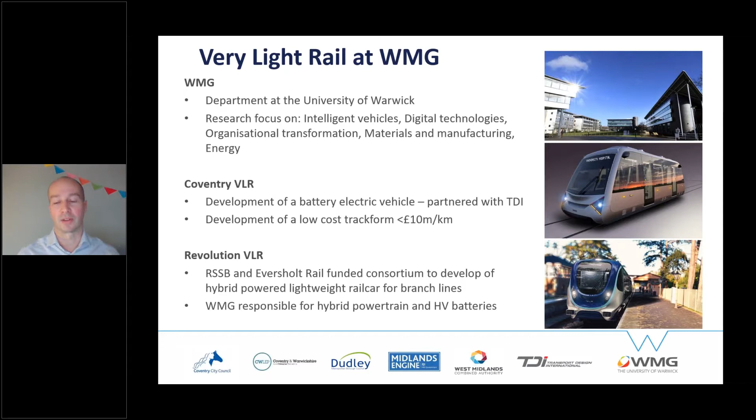So today I'm specifically focusing on the Coventry Very Light Rail project. We started off probably around 2017 with the Coventry vehicle. We've been working with Transport Design International right from the start of this project, and I'll take this opportunity at the beginning just to thank them, because obviously we couldn't have done it really without them, so it's been really good to have them on board.

We basically started off with some fairly all sorts of crazy ideas for what the shuttle might look like, and came up with a concept which the council bought into. And ever since then, we've really been focusing on trying to deliver something.

The clear direction at the beginning of the project was essentially a desire for a small shuttle vehicle, short headways, 3 to 5 minutes, with no timetable, very much an electric, zero emission vehicle, and cost and low mass certainly were a key focus for us. So that's the brief summary of where we started.

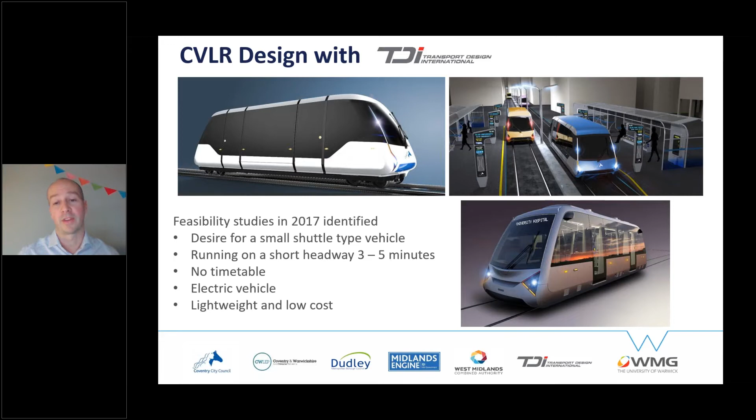We've got a rendering, bottom right, of the approved look and feel of the final vehicle, and I hope you'll agree that as we've progressed, we've ended up with a vehicle that looks very similar to that. Our current status in terms of the build is that amazingly, despite COVID-19, we've actually managed to continue.

The supply chain have done their very best to keep supplying parts and such like. The pictures you see here were taken a couple of weeks ago at the build site, which is in Coventry, NP Aerospace, and it's been a great achievement to get to where we are.

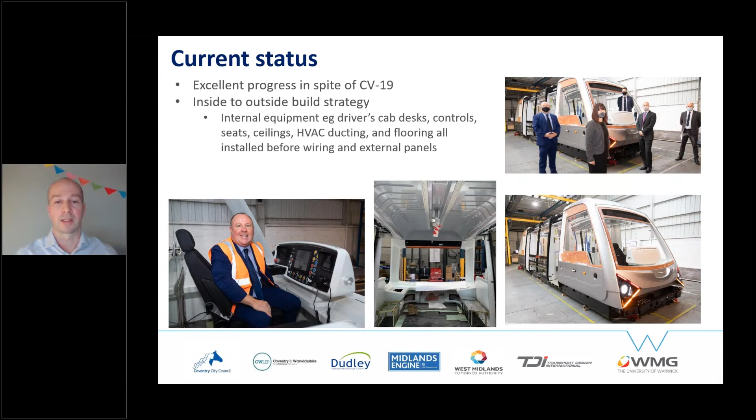You'll notice from the pictures it's sort of a skeleton you see there. The build strategy has been very much: we build the skeleton, then we put all the interior in, and then we put the wiring and the external panels on it. So it's not necessarily built in a conventional fashion, but we're making very good progress, and we hope to be on track in around February 2021 at Dudley.

So just what I'm going to talk about today in a bit more detail. First of all, the UK content - it's designed and built in the UK, but there's still plenty of opportunities for future vehicles. The fact that it's a zero emission vehicle, a bit of detail on the battery, how we charge the vehicle, and a little bit on the construction of the vehicle itself.

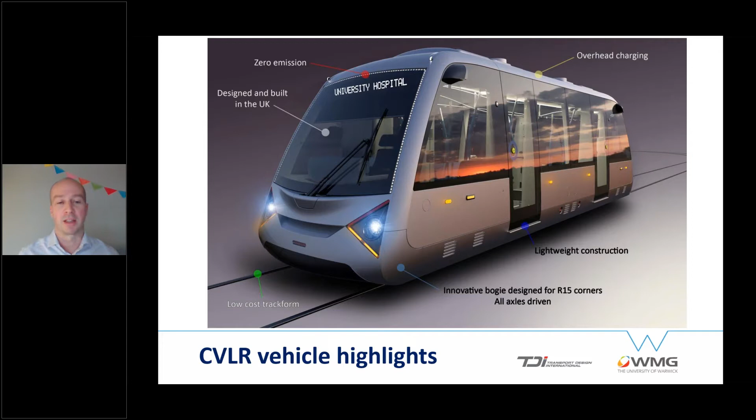We do have what we consider to be an innovative bogie. It is subject to a patent application, and as such I won't be giving any real detail about that. But we will be talking about the low-cost Trackform - Chris will be talking after me essentially about the low-cost Trackform, so I won't say anything about it. I'll just focus on the vehicle.

In terms of the UK focus, we think, certainly in combination with TDI and everyone else in the supply chain, we've achieved essentially over 70% by value in terms of the UK content for the vehicle, which we're really impressed with. Actually, it's been a great achievement to do that.

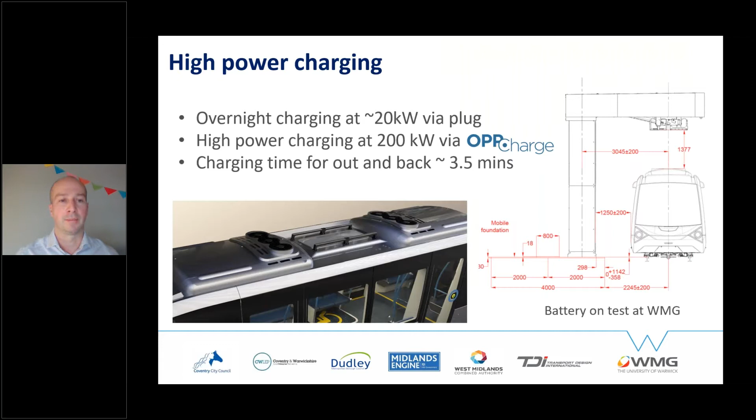In terms of the structure itself, we've got many materials involved: steel, aluminium, composites used wherever necessary. Our mass target was sort of 1 ton per linear meter, which is the general consensus for very light rail. We have an 11-meter long vehicle, and we've achieved sort of an 11-ton mass of the vehicle, so we're actually quite pleased. If you look at the image to the bottom left, you'll see a cutaway of the vehicle.

With the battery packaged tightly in this space beneath the floor, and then at each end is the bogie, and obviously there's a maximum amount of space for people within it. The key mass advantage we've got has been very beneficial in terms of the actual loads introduced into the track. So we're seeing lateral loads circa 12 kilonewtons versus 50 kilonewtons for a typical light rail vehicle.

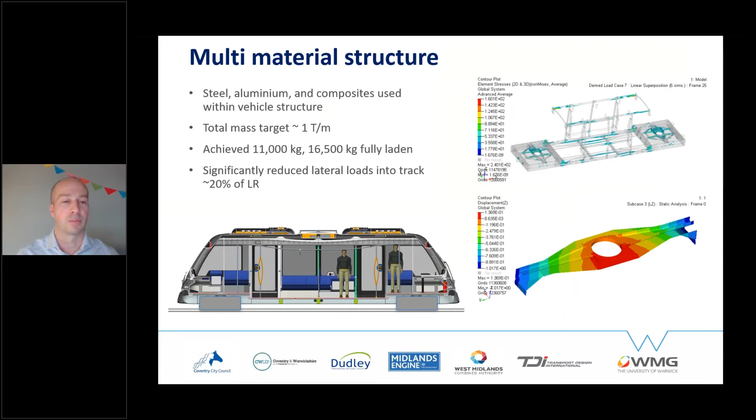All that gives advantages essentially in terms of how the track can be designed and produced to be as low cost as possible. In terms of the composite materials, we've included a number of different materials throughout. Just as a few examples, the bumper is designed to be extremely flexible, actually produced by a motorsport company. It's a carbon polyethylene composite, so you can bounce off it, it'll flex and won't crack. Nice quality component. The actual cab molding is one complete piece, and that's a carbon Kevlar for impact resistance and a phenolic for fire resistance.

And then throughout various other components on the vehicle, we've added a certain amount of sustainability by using recycled carbon fibre from the site in Dudley, from ELG Carbon Fibre. So things like this ceiling panel you'll see here, and for the exterior side panels and such like.

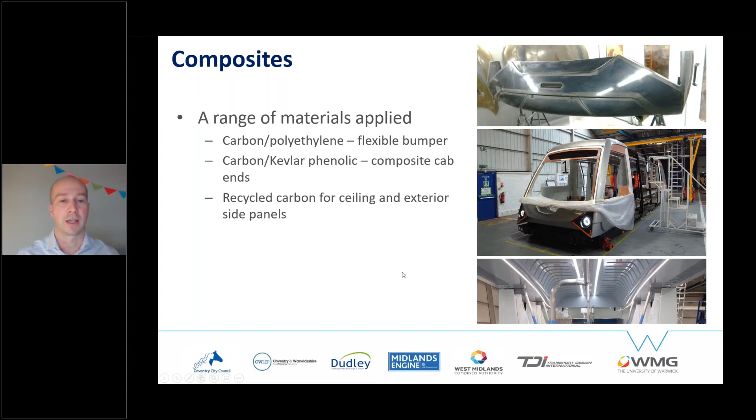In terms of the future for the vehicle, there's plenty of opportunities around. We certainly see autonomy as a major item that needs to be attended to in the next few years. We did spend quite a bit of time at the beginning of the project deciding whether to actually install driver seats on this vehicle or not. It was considered that autonomy wasn't quite ready at the time we were designing it, so we did include driver seats.

But it's very important for this system to be economic and achieve a suitable business case that autonomy is a feature later on, because obviously with small vehicles, lots of them, that means lots of drivers, which means quite a high cost of operation. So autonomy is really important. If it can be achieved by 2025, that would be amazing, but probably more of 2030 would be a good achievement.

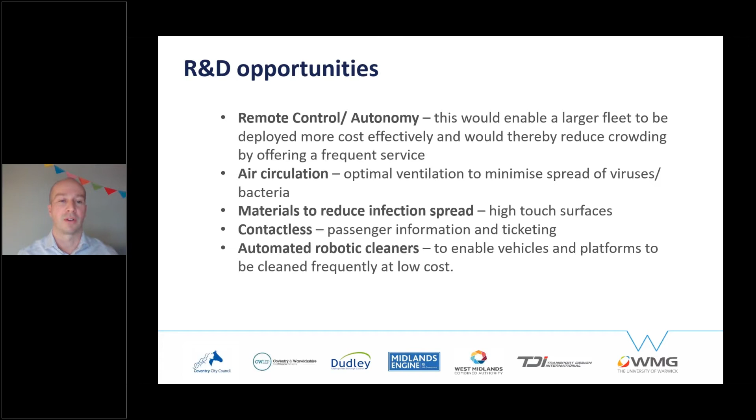There's also many opportunities that have appeared as a result of COVID in terms of air filtration, materials to manage infection spread, how you deal with passengers waiting and paying for tickets, and clean vehicles and all that good stuff. So many opportunities for R&D that we see in the future, and there's just a list of a few. I've included a couple of projects that we have running in parallel with this one.

The first one is an Innovate UK funded Resi Glaze project. This is focused on using polycarbonate glazing, and this helps address some of the recommendations from the Sandilands report, and this hopefully will achieve circa a 44% mass saving over glass and improved crashworthiness.

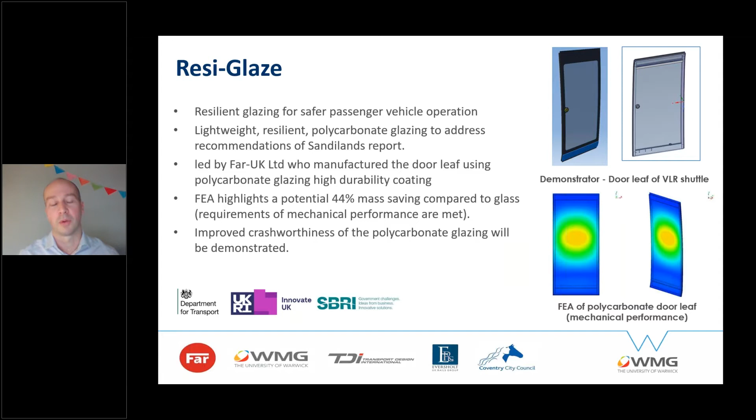And the actual polycarbonate itself, the key challenges are: one, the anti-yellowing element over time, and second, having a coating which gives you the durability, the anti-scratch coating that will essentially give it its long duration required on a rail vehicle.

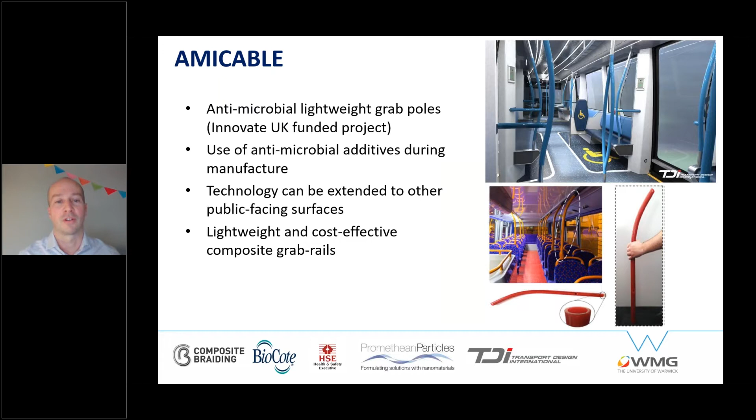Another project of interest is called Amicable, antimicrobial lightweight grab poles. We considered all sorts of different materials for the grab poles when COVID came along. We were a little late to change to a copper alloy, but we've subsequently looked at this project where this will be a composite braided grab pole with antimicrobial, antiviral additives - an inherently lightweight, stiff and strong grab pole, which will be a nice addition to the vehicle.

In terms of the timeline, what interests people most is the opportunities. Right now, end of 2020, we're very close to finishing the build. We'll be testing the vehicle very shortly, February 2021. Very shortly after, while the vehicle is still testing, we'll start planning for low volume manufacture, and helping set up the appropriate processes to make that happen, with the intention of having approximately 17 to 20 vehicles ready to operate in 2025. Quite a challenge, given this is our first prototype, and there will no doubt be some evolution before production.

And down at the bottom, you'll see the general phases that Coventry are going through, where the consenting phase is very much the Transport and Works Act order type timeline.

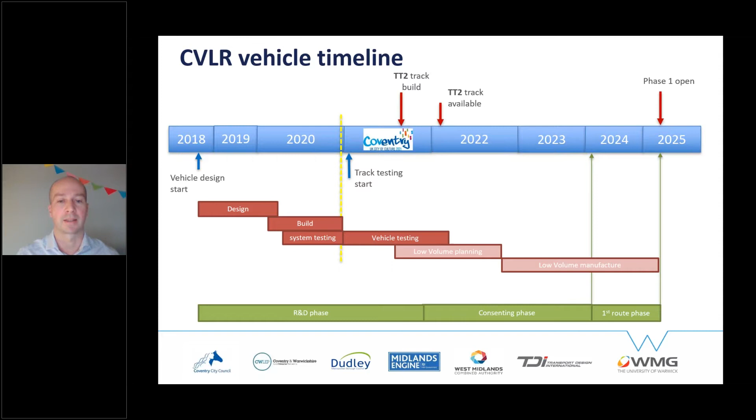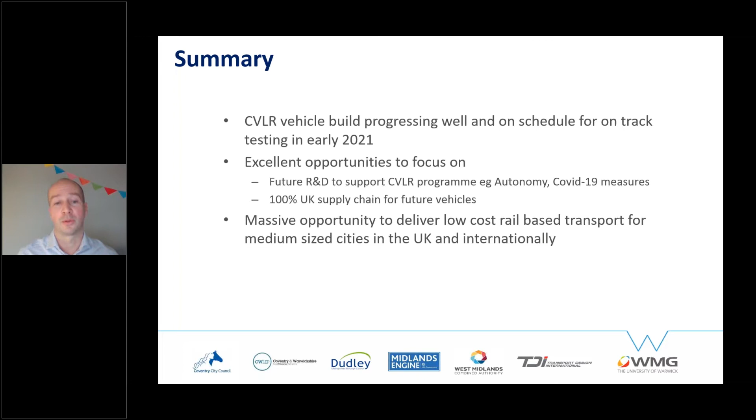So finally, just to summarise, the vehicle build is progressing well. We're really optimistic we'll be on track shortly at Dudley. There are excellent opportunities for future R&D to support the programme, and also to bring components such as the battery and bogie, finding opportunities to build them in the UK. This whole project is a great opportunity to deliver low-cost rail-based transport for medium-sized cities in the UK that wouldn't normally be able to afford a light rail system. I think that's it from me, so many thanks for listening.

Thank you, James. Like all the best railways in the world, that was bang on time and a great overview. Well, there's no railway without rails. So now we're going to continue with the Coventry VLR with a presentation from Chris Micallef from the University of Warwick, who's going to talk about the lightweight Trackform. Over to you, Chris. Hello, good afternoon.

I'm Chris from WMG, which was introduced by James before me. Thank you, James. And I'm going to be talking about the other aspect of this project, which is the track development project.

So I guess the first question is, why on earth do we need an R&D project to bring back trams to Coventry? Coventry had trams since 1884. Unfortunately, it was the war that spelled the last trip of that system, but hopefully we'll bring them back by 2025. So the question is, why is this R&D project needed? And I guess probably most of you know the answer, and it's all to do with money.

So I have here five of the more recent tram projects in the UK. Clearly this is a very high level rough number, and in this number there's a lot of stuff like rehabilitation, etc. going on. But in any case, these projects are ending up costing a lot, in excess of 30 million a kilometre, and well above that. The latest of all of these is the one in Birmingham, where a mile of track is going to cost around 200 something million.

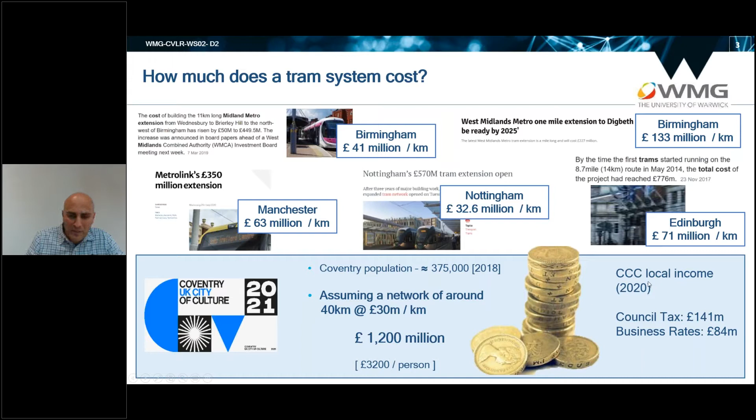Still, the interest in trams has been very, very strong, and we are being pushed to understand why this cost is so high. So at the start of this project, one of the first tasks we undertook was to try and understand where the costs are coming from.

One of the few databases on costs available was from Edinburgh, resulting from the big court case there. As you can see, in that case around 65-75% of CapEx is directly related to track build. If you go into detail of where this cost is, steel and concrete, as we know, are relatively cheap materials.

If you go into the detail of most Trackform structures, you're talking about a net installed cost of about 2 to 3 million a kilometer. So if I give you a virgin field, most installers will be able to deliver track for that cost, because the vast majority of cost, snowballing, is coming from all the other elements included.

This is earthworks. Because you need to dig down, you'll be encountering utilities most of the time, and you have to move them. Project duration starts inflating, related risks, prelims, project management, all of these aspects - and the project cost just keeps snowballing and snowballing.

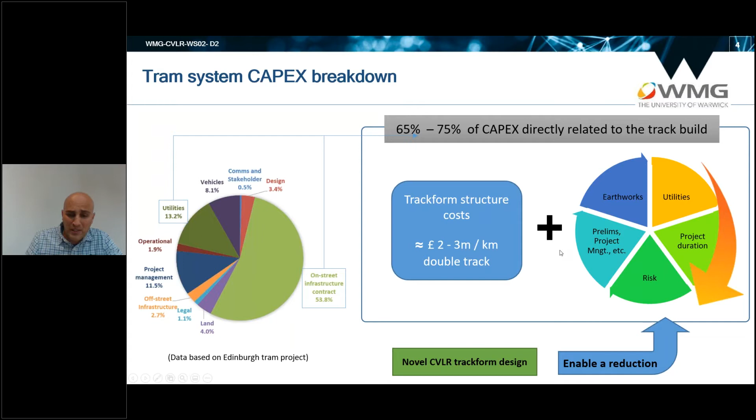And the way we're trying to do this is by focusing on three aspects. The first element is simplifying the whole system.

As James introduced the work being done on the vehicle, as you will appreciate, the cost of the vehicle itself is low. However, it is the design of the vehicle - the onboard battery pack, drivetrain, the lightweight structure - that is enabling us to greatly simplify the Trackform structure.

In addition, time is a critical element, and by reducing the duration of the whole project, a lot of cost savings will be achieved. Probably most important is avoiding issues in the first place. By not digging deep, by not going anywhere near the hidden problems under our highways, we are hoping to literally avoid most of the costs associated with these aspects.

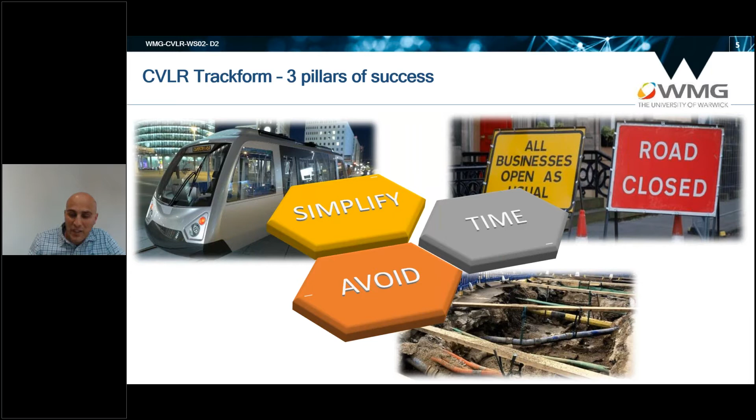So here is the outline of the project and its current contracted aspect. We started the project around October 2018 - let's call it around 2 years ago, 2 years and a bit. The vast majority of that duration was taken by a significant requirement specification process, together with quite an extensive procurement process for a partner.

As WMG and the council, we were looking for a track design expert to accompany us on this project, and there was big interest from the market. In fact, we had around 13 bidders, all significant companies from all over Europe, and we had quite an extensive procurement process. We're quite glad to have found a very good partner who's been making extremely good progress so far, based in Europe.

I'll introduce them in a later slide. The current stage of the project is a classical design project, starting from a concept phase which has been successfully concluded, and we've passed the gateway onto the detailed design stage, which is the current phase. The plan is then to go through a final detailed optimization phase and further testing programs, but more on this later in the presentation.

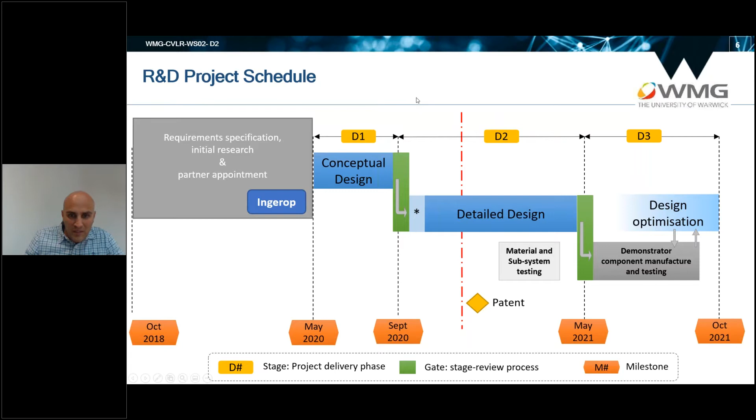So I have two slides on our key partner in Europe and their UK subsidiary Rendel. Ingerop, as I introduced, were the winners of the procurement process for key Trackform design partner. They are an engineering consultancy, pure engineering consultancy in the areas of transportation, infrastructure, and building and energy. They purchased a while ago Rendel, a UK-based consultancy.

Between expertise specifically in highway construction at Rendel and the Trackform expertise at Ingerop from France, and the team at WMG, we are leading forward this project.

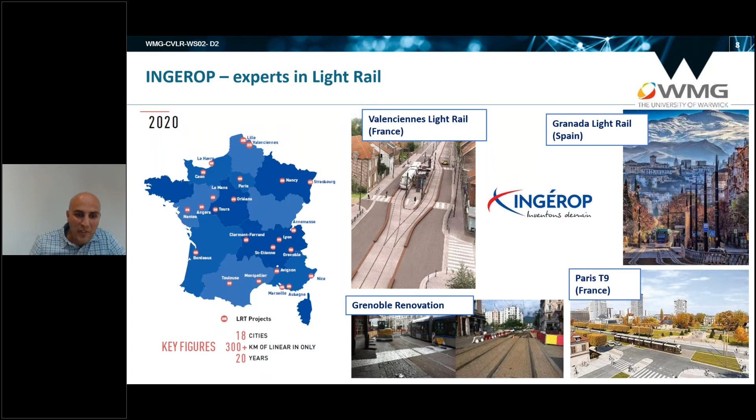One of the key aspects of Ingerop which helped them win this contract was their expertise in light rail, specifically in light rail Trackform engineering. As you can see from this, they have their finger in the vast majority of light rail projects in France and also in the rest of the world.

Ingerop tends to be a company involved in the actual design and engineering of a Trackform rather than simply the alignment of a route, which is what we are after in this project. We are after a novel Trackform specification.

So I'm going to now move to the next section of this presentation, looking at the requirements we have specified for the design of this Trackform. Some of these requirements are significantly different from requirements set for any other light rail Trackform, as you'll know, and I'll try to highlight some of these.

There are 5 key requirements which differentiate what we're trying to do in this project from other typical light rail projects. This slide summarizes 12 key requirements which, at the end of the process, helped us choose between the various concepts we came up with. These fall into 4 key categories. The first group of requirements was specifically set to achieve our strategic objectives.

We had a whole set of requirements that was quite atypical for other Trackforms, looking at defining a new management strategy to deal with utilities. Then we clearly set ourselves quite stringent route delivery requirements, and also all the other operational requirements you might imagine, such as maintenance, etc.

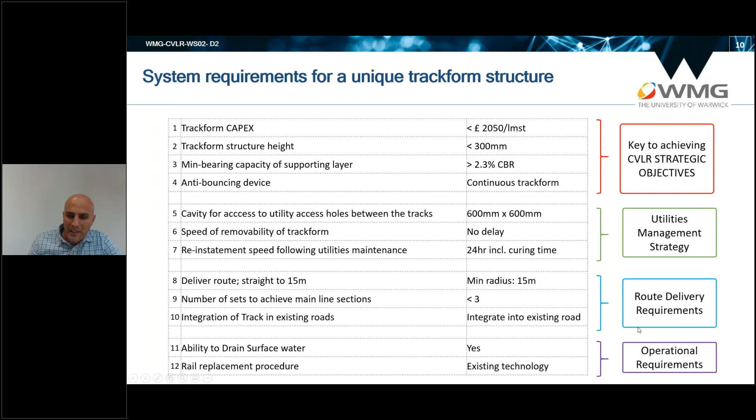So clearly, we're talking about cost. One of the first requirements we set was a capex requirement, and we set ourselves a target of around 2 million per kilometer of single track.

We did quite a lot of work when defining the requirements to detail exactly what we're including in this cost. To summarize, we agreed with the council that for that cost, we're talking about taking an existing highway, digging it down, building up the Trackform, and repaving it — giving back essentially a highway with an embedded Trackform, pretty much as shown in that photo.

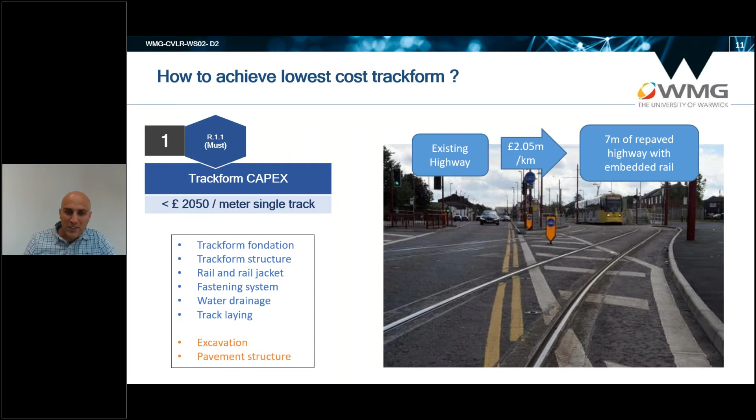The second requirement, and probably one of the most critical to achieve what we're trying to do, is a shallow Trackform structure. We've agreed that our design needs to be limited to 300 millimeters — more specifically, 300 millimeters total dig depth. The aim is to bring a normal milling machine onto our highway and mill down to a depth of 300 mil, and within that depth build up whatever structure or concept we come up with, so it needs to sit within that envelope.

That was mainly based on the NJUG guidelines, which specify that all utilities should be at a depth lower than 450 mil, and safety-critical utilities should be at a depth lower than 600 mil. So in a way, we've put quite a safety margin there.

Another requirement was that we need to be able to accommodate surface access chambers within our Trackform. The reason is that our highways have a lot of these access chambers, and moving them would typically cost more than the budget we've set for the Trackform itself. So being able to leave access chambers where they are is also of critical importance.

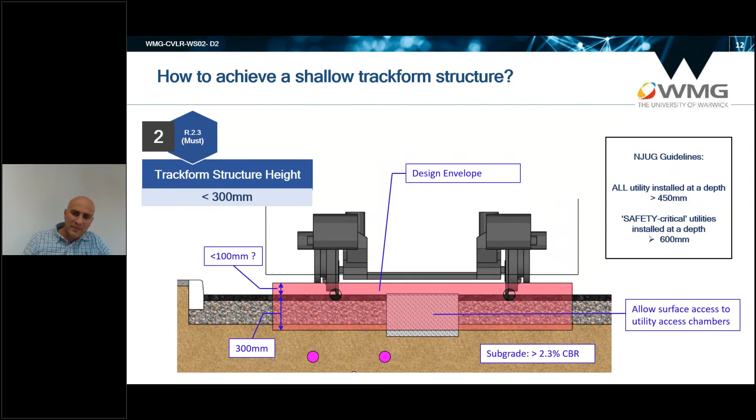Third requirement: the whole strategy of the project is that we're going to dig down just the top 300 mil and then live with whatever we find there in the vast majority of cases. So there's no point designing, let's call it, a marshmallow Trackform structure which cannot survive unless you have a perfect subgrade foundation. So we did quite an extensive analysis of the typical structures we tend to find under our highways.

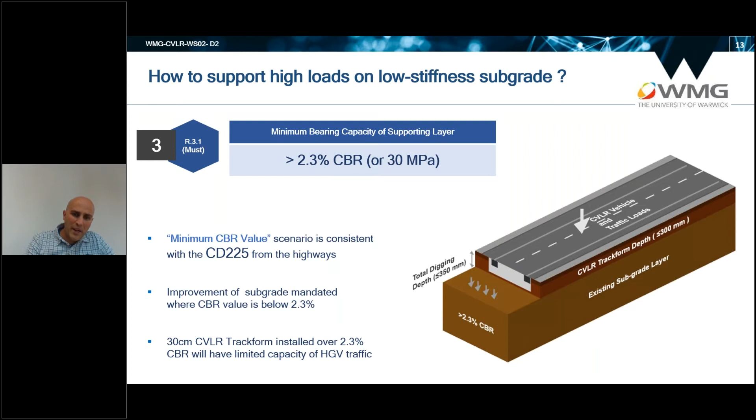We were lucky to have quite an extensive database of historic cores on roads around Coventry. The analysis basically yielded, unsurprisingly, a vast variation of road structures. Hence, the only reasonable assumption to go with was that we had to design for, let's call it, a soft foundation layer. So we specified ourselves quite a conservative bearing capacity of around 30 megapascals.

The last two requirements I'm going to talk about relate to our strategy for dealing with utilities. As you well know, there will be a lot of utilities buried in our highways, and in typical cases, most of these utilities are relocated to allow the Trackform to sit on top. In some cases that's happening because of actual physical clashing, but in other occasions it's simply occurring for the necessity to allow future access to these utilities.

The strategy we are adopting in Coventry is to transfer the risk onto the trackform delivery company, allowing utilities to treat this as if it were a normal road. To sell that to utility owners, we've set ourselves the requirement that we must be able to remove the road, the trackform plus the road, as if it were a normal road, so we are not hindering the speed of a utility company accessing their utility during an emergency repair.

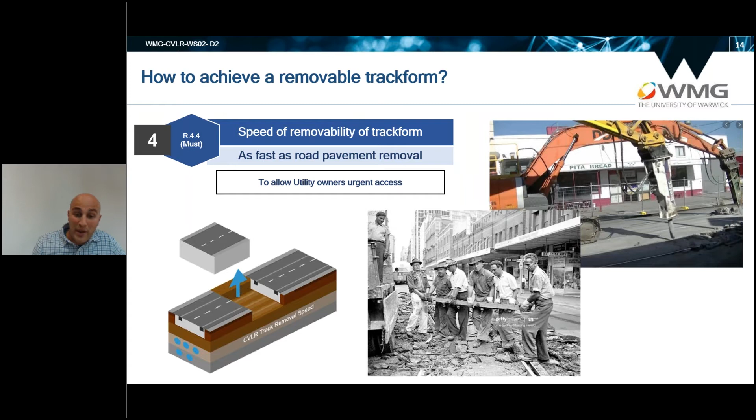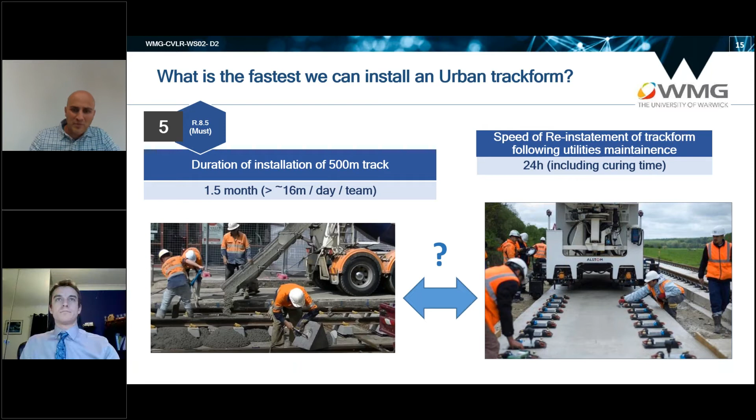Related to that, and to the overall project strategy, is the speed of reinstatement and installation. We've set ourselves a speed of about 16 meters per day per team for fresh installation of the track, but we've also set another requirement: being able to reinstate a small section of track in 24 hours or less, dealing with the emergency scenario.

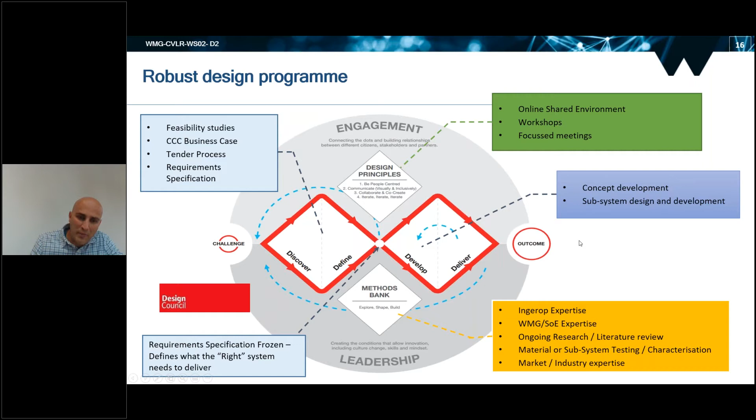Throughout this, it's been critical to follow a robust design process. We followed the UK's Design Council guidelines, because what we're trying to achieve is a very robust trackform design process, so that all the results of this program can be carried forward and adopted by future cities. Most of this program's aim will be to publish what we're doing and achieving.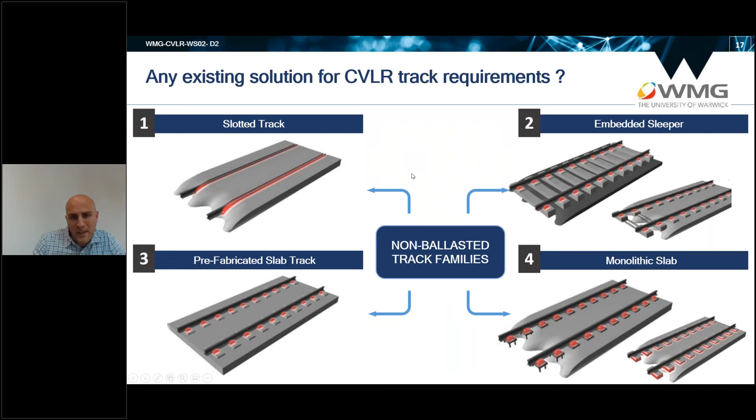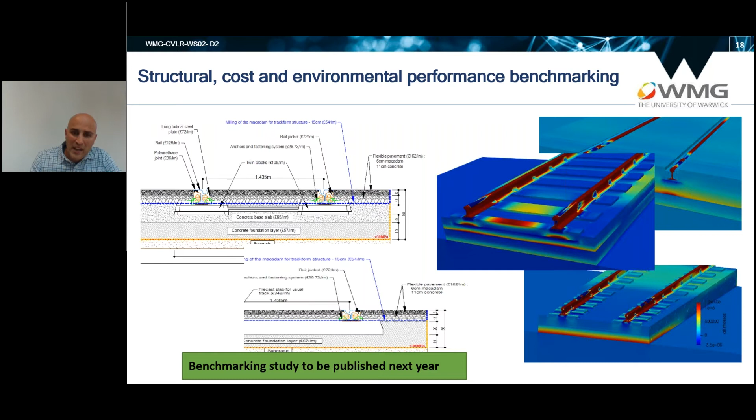As part of our design process, after an extensive requirement specification process, we've also gone through an extensive benchmarking exercise where we studied all existing trackforms and compared them against our requirements. We've carried out extensive structural analysis and cost and environmental performance benchmarking, to study exactly what these are and how they fit against our requirements.

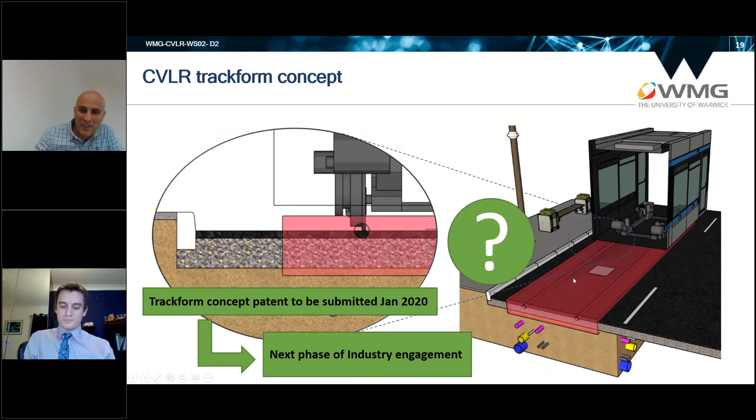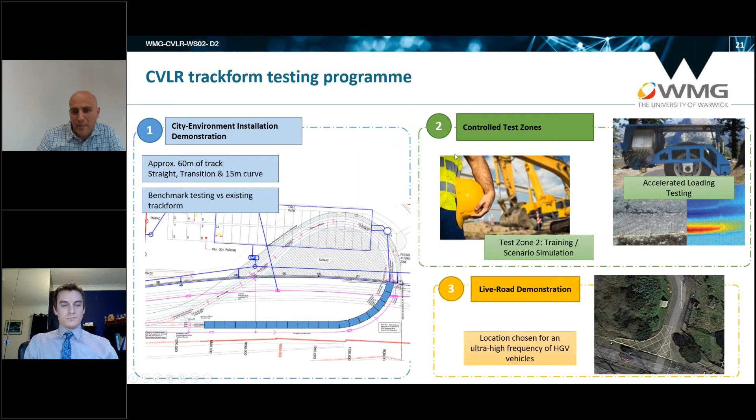This might be a disappointing slide since most of you were hoping to see the concept itself. The reality is we have a patent being filed, hopefully by the end of this year, but if not, definitely January. Following that we'll be looking at engaging with the industry again to discuss future phases of the project, which will include an extensive testing program, construction of a test track, and necessary testing of this novel trackform.

And that brings me to an end within the minute given.

You're mute, Sam. Sam, you're still muted. Classic — first time presenting, my apologies.

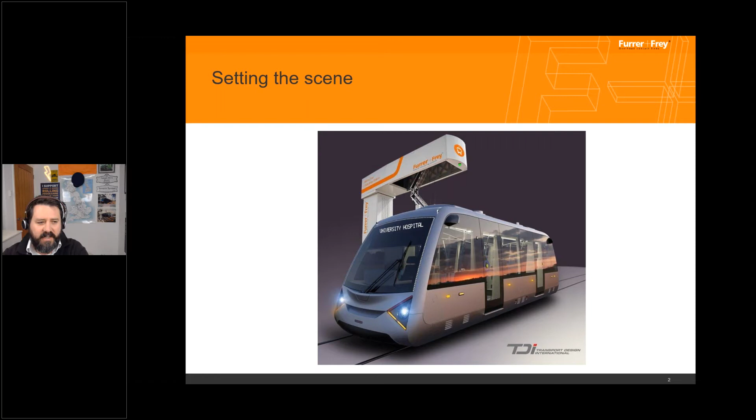However, for the past 10 years, we've also been working on developing battery charging technology for public transport. Tram wires, trolley wires, overhead line are great, but in certain situations batteries also provide a real benefit and a real solution. For the past 2 years, we've been working towards testing at Dudley that will commence early next year.

Where did our charging journey start? Well, it didn't start in rail, it started in buses. We've been working on charging technology for 10 years, mostly in buses, and for that whole time we've been working on opportunity charging, which James mentioned earlier. Opportunity charging is essentially just providing top-up charging, normally at the end of routes - rather than having large batteries that vehicles lug around all day, it's having smaller batteries that are continually topped up throughout the day.

That means smaller batteries and more space for passengers. It also allows for a distributed energy grid, so there's the option to place chargers where there is capacity in the grid rather than charging a large number of vehicles solely in a depot.

I've got a few photos from projects we've worked on in the past couple of years - Spain, Belgium and Switzerland are in those photos. Worth noting that with at least 2 of those projects, they were combined with battery banks powered by solar and wind power, so there's also a strong link into renewables for cities as well.

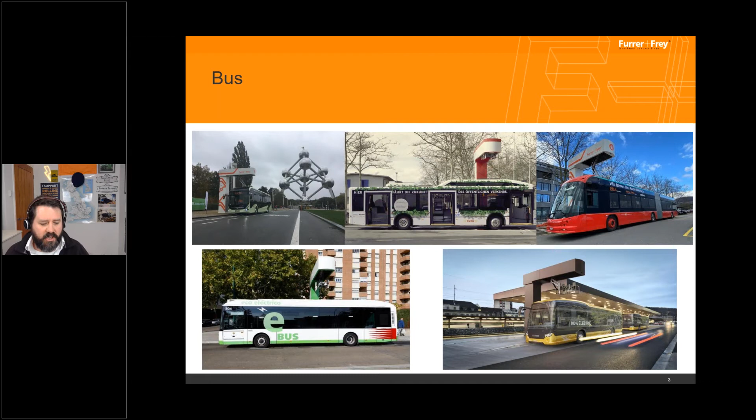So from buses, we started talking with the team for VLR about how we can make something interoperable - how can we use the same technology to charge buses but also charge rail-mounted vehicles? The real reason for that is if you can have common infrastructure, you can create a more standard product and considerably reduce costs.

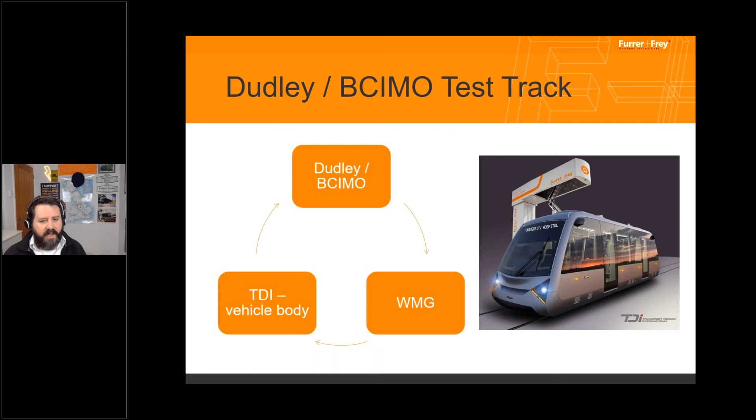So this is where we are. We've been working with WMG, also with TDI, who are developing the vehicle body. WMG are doing the integration, and now with the test track in Dudley and the Black Country Innovative Manufacturing Organisation, the first trial is in January, February next year, with real operations beginning in February. It's happening really, really soon.

With a lot of industrial charging, you'll see some form of a charger and somewhere down the road a grey shed with a lot of power banks, whereas in this case everything's in the charger, and that mast is 80 centimeters by 80 centimeters. The charger itself is initially a 200 kilowatt charger, and the final version coming in April will be 450.

There's a pantograph on the charger, again to keep vehicle weight down - the pantograph and as much infrastructure as possible is on the charger, so the vehicle just has contact strips, which are relatively small and light. We've tried to create a common charger used in buses, but it's also designed to accommodate double-decker buses, so there's a single piece of infrastructure whether you're having a VLR vehicle, single-decker or double-decker - it's a single unit. Again, that's about lowering costs.

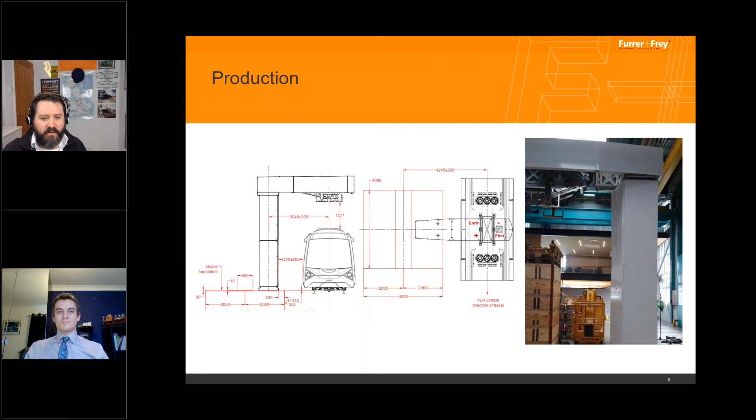One other last point I want to make before I run out of time is we worked really hard this year to try and build the test charger in the UK. COVID slightly screwed that up as we couldn't get teams over to train our UK team. So the trial charger has been built in our parent company in Switzerland, but we hope that the main charger and subsequent chargers will be built here in the UK, COVID allowing.

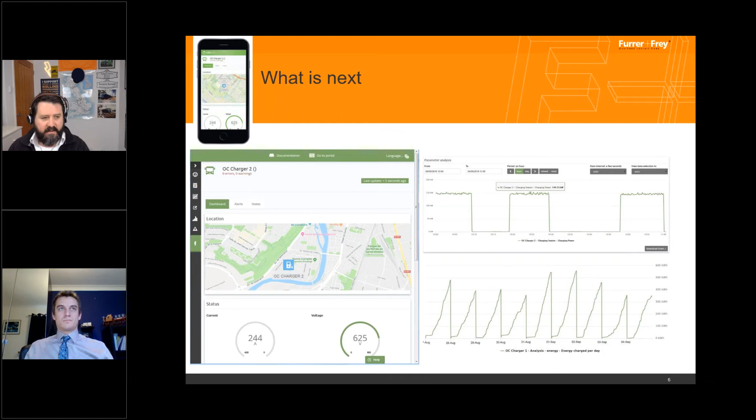So yeah, I'll let you go there. I'm sure we'll take some questions later on. Thank you very much, Noel.

Noting James's times earlier, in the time for that presentation, we'd have got a full charge and we'd be back out in revenue service. So we have John Hammond from Precast Advanced Track to tell us all about their modular slab track. Over to you, John.

Okay, thank you very much, Sam. Thank you everyone for allowing PCAT to do this elevator slot. We have worked with Innovate UK previously and won funding, but PCAT is a smart track system. And like the government, we want to build back better. We have a history of building railways, which is exceptional, and we need to think about future materials. So greener, leaner, cheaper, definitely an aspect of what we want to achieve, but also safer and smarter railways.

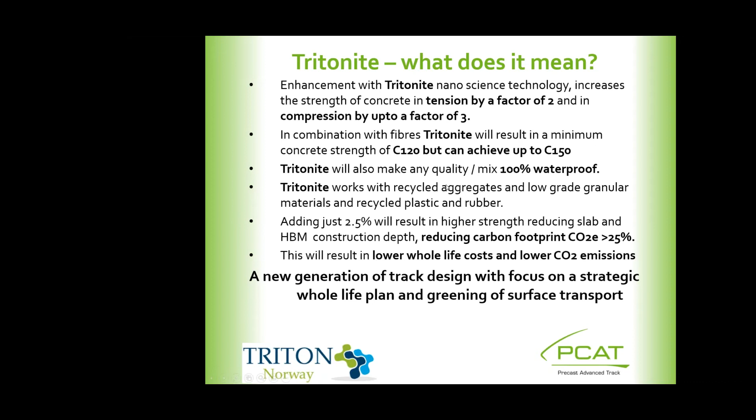Who are we? Well, PCAT - I'll jump in about the slides, I'm sorry. PCAT was established in... I'm sorry. Can you, would you like me to run them for you, John? I'll run them for you. Okay, thank you. Yes, PCAT was established in 2010.

Our partners have been Barchip, who make macro-synthetic fibres. They were installed in the Japanese high-speed railway, and we were the first company ever to put them in precast slabs. The big value with their carbon fibre materials, polypropylene materials, is to reduce the need for steel in the slabs and reduce the carbon footprint and impact of carbon by 70%. That's been happening since 2010, but now we have a new partner that's bringing a new type of concrete additive into this industry, which is Tritonite.

And my colleague Phil Downs will talk about Tritonite. Thank you, John. Good afternoon, everybody. Triton Norway is a company who does quite a lot of innovation. We've got quite a few innovative products, from controlling water in structures to recycling plastics, and lastly looking at a concrete additive. It uses nanoscience technology and basically increases the strength in tension by a factor of 2, and in compression by up to a factor of 3.

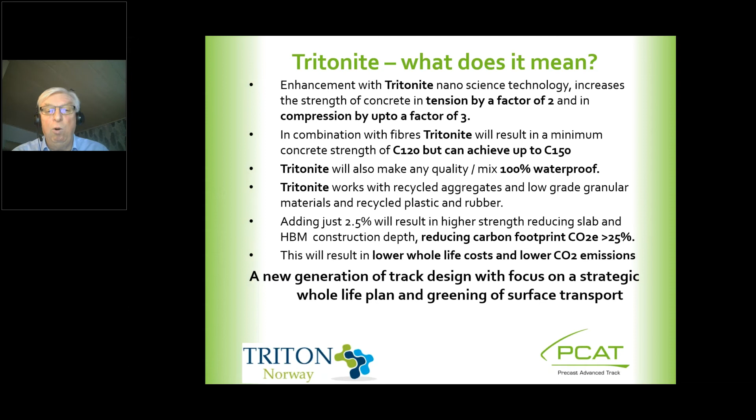The addition really is just about 2.5% that we look to add into the mix, a very small percentage if you like, but reducing CO2 content by probably over 25%. So whole life costs and lower CO2 emissions, and really now enables a complete new generation of track design.